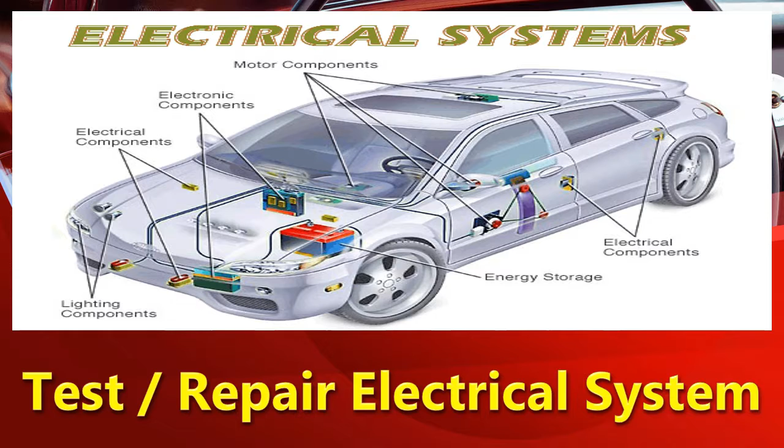We are group 1, here to present to you course outcome 7: test and repair electrical system. Our objectives on this topic are performing battery servicing, performing jump starter inspection, performing alternator inspection, and testing and replacing electrical components. These objectives will focus on the course 7 outcome.

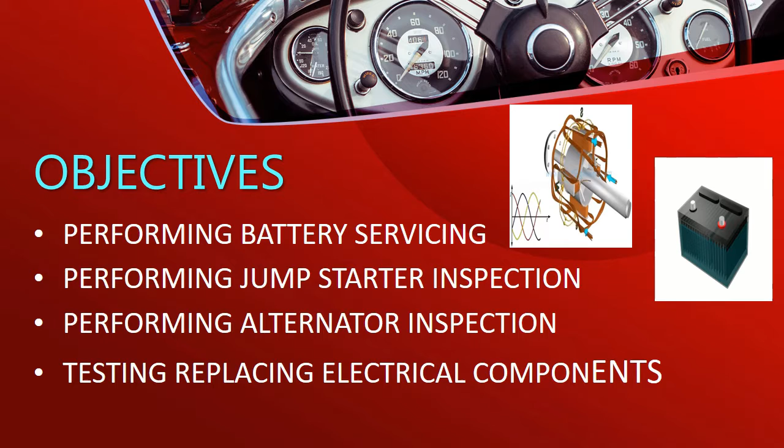Before we start, these are the safety equipment you need to use when working in the workplace: eye protection such as goggles or face shield, foot protection, head protection like a hard hat, hand protection, hearing protection, breathing apparatus, and also keep clear.

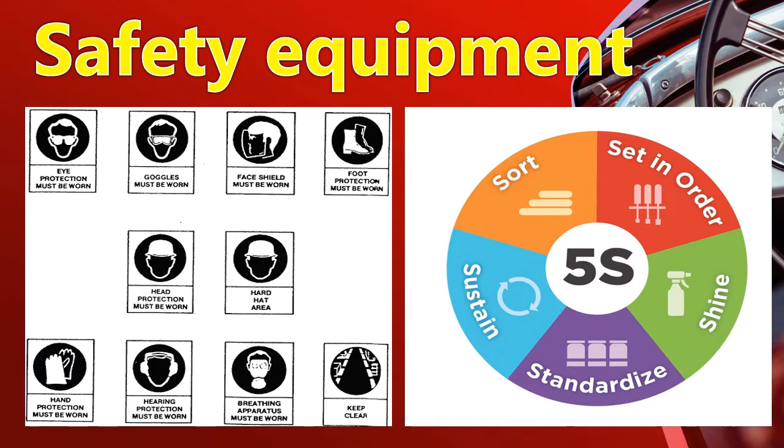Then these are the 5S: sort, set in order, shine, standardize, and sustain.

These are the tools needed for repairing the electrical system: first the multimeter, second plier sets, third SST tools set, fourth hydrometer, fifth battery terminal spray, sixth wrench set, seventh screwdriver set, and the last is a socket wrench set.

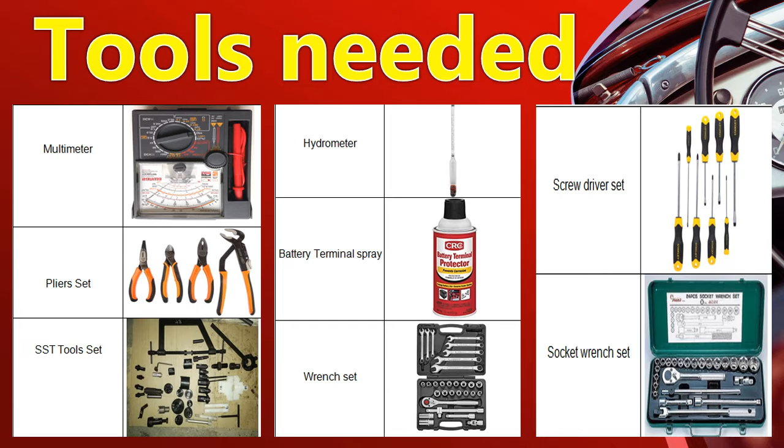So let's start. First topic is battery servicing. We have two methods to service the battery. For the first method, performing battery maintenance, this method will tackle different maintenance on our battery, for example cleaning, inspecting, and so on.

On the first step, clean the battery terminals with water and baking soda. First, identify the positive side of the battery by finding the red cap. Always disconnect the negative side first. Turn the bolt connecting the wires to the negative terminal counterclockwise and lift the wire up. Do the same for the positive side, making sure you don't touch the two wires to any metal parts of the car.

Then make a 1:1 mixture of baking soda and water. Dip a hard bristled brush into the solution and scrub both battery terminals.

This step will teach you how to clean your battery, especially the positive and negative terminals. Also, once you are cleaning the battery, never let the two wires touch each other, because this can cause sparking or explosion of the battery. Keeping the battery clean helps it run perfectly, and also prevents any hazardous things happening to your car.

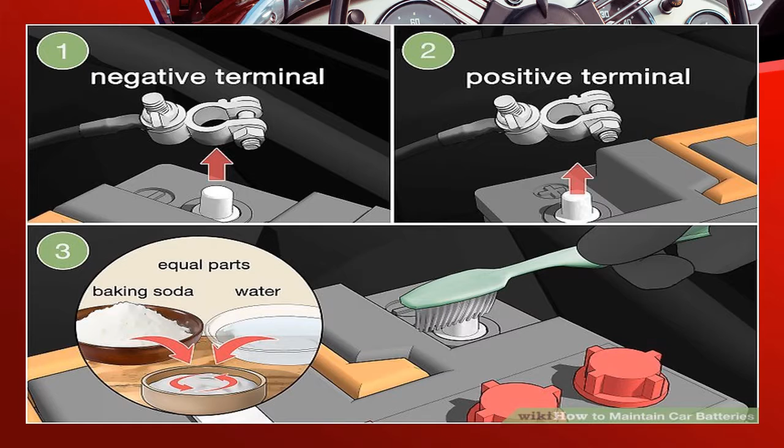Second step: coat the battery terminals in terminal spray to prevent corrosion. After cleaning the battery terminal, protect them from further corrosion with terminal spray. Hold the can 4 inches or 10 cm from the terminal and spray until the connection is coated, then spray the other terminal.

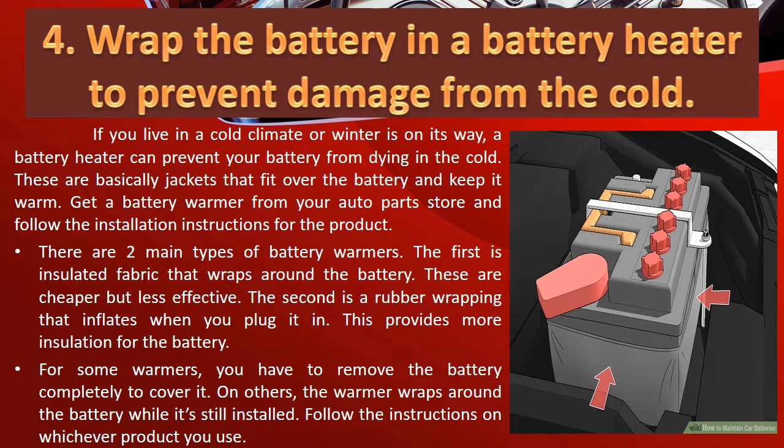Step 5. Check the battery fluid level and add distilled water if it's low. Unscrew the vent caps on top of the battery and look inside each cell with a flashlight. The fluid should cover the battery plates. If it doesn't, the level is too low. Pour in distilled water until the water covers the battery plates and reaches the bottom of the cell refill holes.

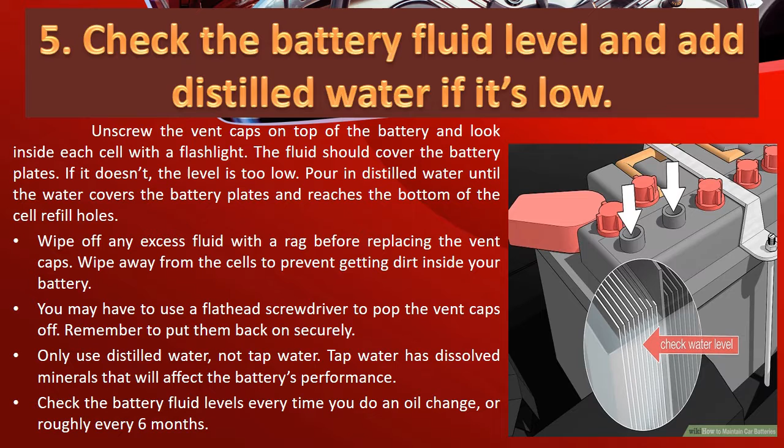Step 6. Buy a battery that's less than a month old when you replace yours. When it does come time to change the battery, always get a new one. Look on the side of the battery for the manufacture date. Find one that was manufactured within the last month for the best battery performance.

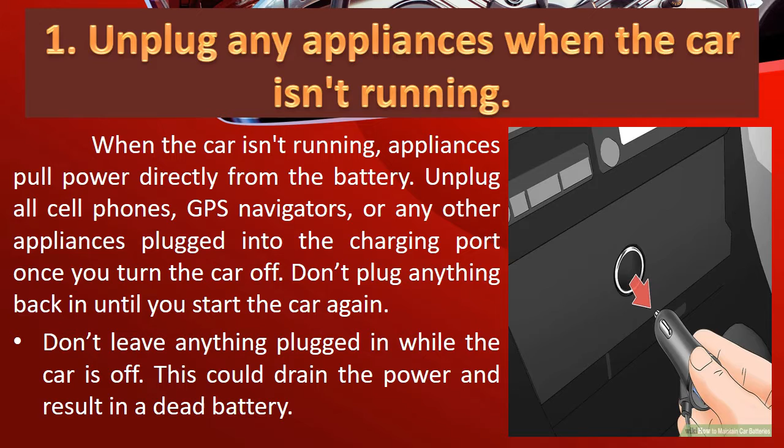Step 2. Turn off the headlights and interior lights when the engine is off. Just like appliances, these lights pull power directly from the battery when the car isn't running. Once you turn the car off, turn off all the lights that are on. Don't start them again until you start the engine.

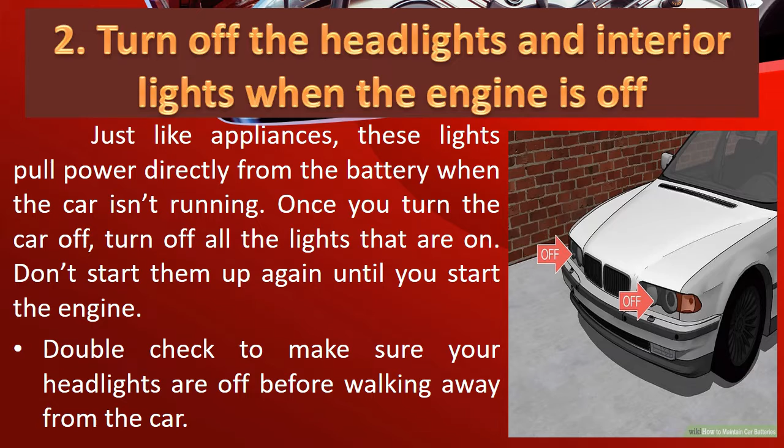Step 3. Drive the car regularly to keep the battery charged. Car batteries recharge when you drive, so don't leave the car sitting for weeks at a time. Take drives of at least 20 minutes once a week to give your battery enough time to recharge.

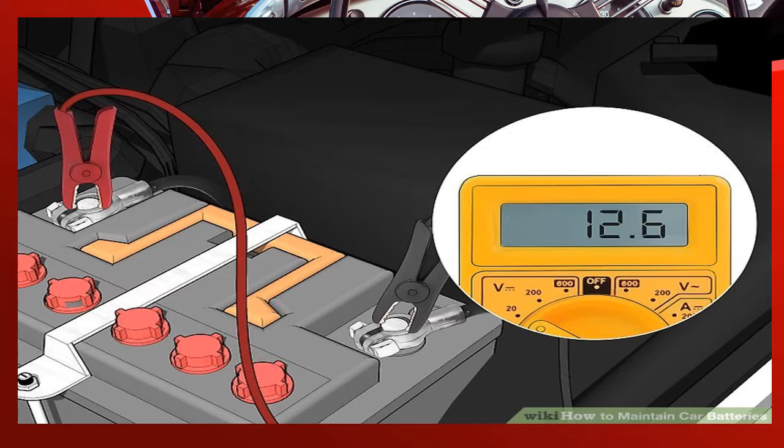Step 5. Attach a trickle charger to the battery if you don't use it for long periods. A trickle charger hooks into a power outlet and provides a steady charge to the battery. This keeps the battery at the correct charge even when you don't drive the car. It's a useful appliance for cars that aren't driven often. Connect the trickle charger the same way you would connect a normal charger. Hook the negative lead to the negative terminal first, then connect the positive lead. Then plug the charger in. Leave it attached until you drive the car again.

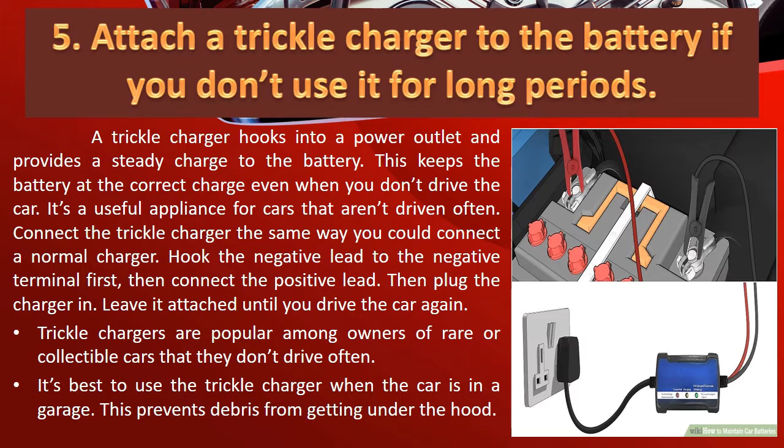So, we are done with our battery inspection. For the next inspection would be the starter inspection. We have three parts to inspect the starter. For part 1, to inspect our starter, first you must check the pinion.

First step, turn on the headlights and try to start the car. A couple of things might happen when you do this. If the car makes a noise like it's going to start but the headlights dim, then the starter pinion is probably jammed. So dito daw sinasabi sa ating first step is you need to turn on the headlights and you need to try to start the car.

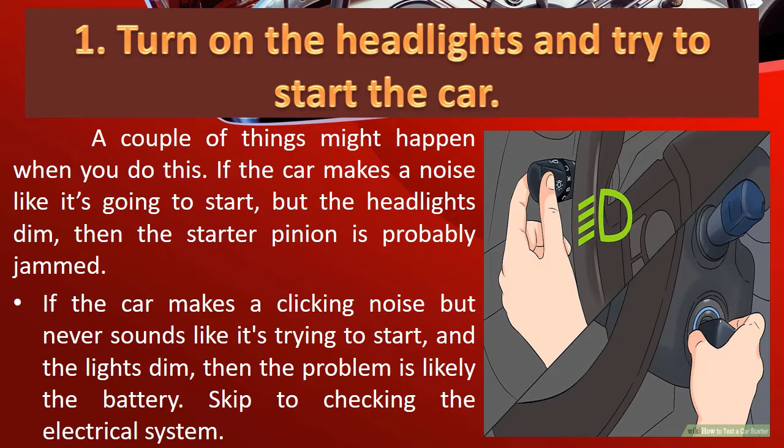Once daw na ang car is maingay habang nag-start, then yung headlight natin or yung dim light, so sinasabi dito that yung starter pinion daw natin is nagja-jam or nagkakaroon ng problema sa ating battery. So kailangan ma-check natin ito upang maiwasan ang kung kahit anong problema para sa ating sasakyan.

Step 2. Turn the pinion stub with an adjustable wrench or spanner. The starter is a large electrical motor in a cylindrical housing, and it's usually bolted to one side of the engine block. If you see a small square stub or the pinion stub sticking out of the end of the cylinder, turn it with your wrench until it moves freely in place. Try starting the car again once the pinion can move freely.

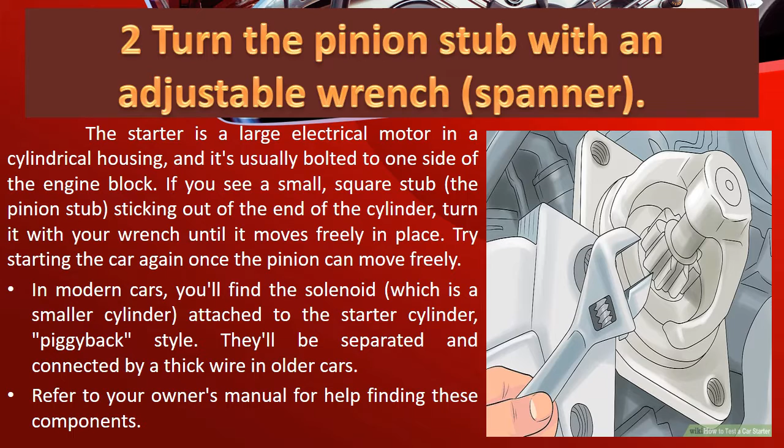So in this step, kung makikita nyo, you need to adjust the pinion stub. So bakit ba natin siya i-adjust? Kaya kailangan daw neto i-adjust is para mag free play siya or umikot siya ng maayos. Then once daw na nag free play na yung ating pinion stub, may indicate neto na okay na ang pagbibigay o pagsusupply ng kuryente doon sa ating sasakyan.

Step 3. Rock the car if you see no stub and have a manual transmission. Turn the car off and put it in second gear. Release the emergency brake and rock the car back and forth. This can loosen the pinion.

So in this step, kailangan daw naka-turn off yung car. Then yung manubela natin is ilalagay natin sa second gear. Then once na nalagay natin, i-release daw natin yung emergency brake para mag-rock yung car natin sa harap and sa likod. Then once daw na parang kumadyot na ganun, yun ang ma-indicate natin na yung pinion natin is maluwag na.

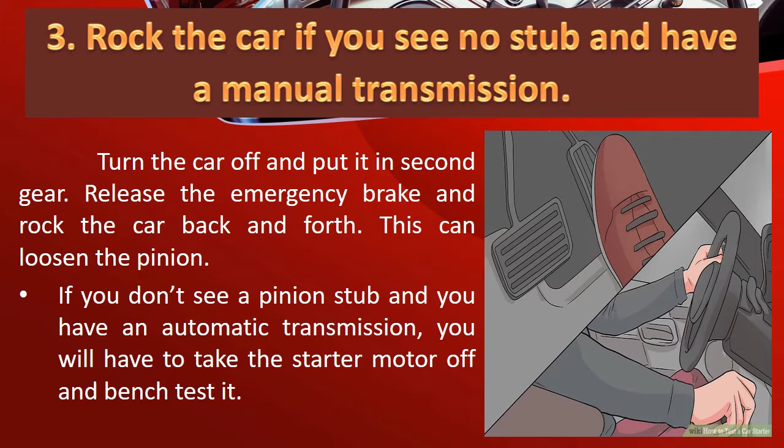So yon, we are done on part 1. Next is our part 2, testing the electrical system. So sa part na ito, titignan natin kung paano tin-test yung battery, kung paano ito chine-check, and also kung paano siya i-measure.

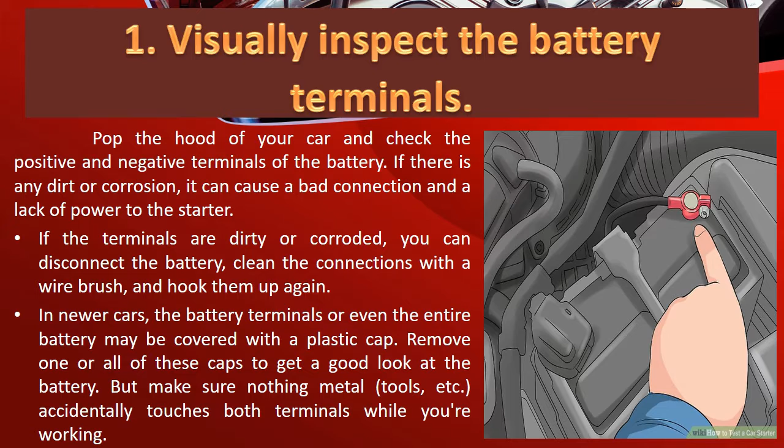First step, visually inspect the battery terminals. Pop the hood of your car and check the positive and negative terminals of the battery. If there is any dirt or corrosion, it can cause a bad connection and a lack of power to the starter. So sinasabi lang sa step 1 na kailangan pagbukas mo daw ng hood is check mo yung mga battery terminals natin kung nagkaroon na ba ng corrosion, rust, or any dirt. Kasi once na meron ng mga ganyang problema, magkakaroon na ito ng kakulangan sa pagsusupply ng power o kuryente sa ating sasakyan. So kailangan maigi na i-inspect natin ito ayon sa oras o panahon na binibigay sa ating service manual.

Step 2. Test the battery's voltage with a multimeter. Set your multimeter to its DC setting and its dial to 20 to test from 0 to 20 volts. Place the red probe on the battery's positive terminal and black probe on the negative terminal. You will get a reading above 12 volts if the battery is working properly.

So sinasabi lang dito sa step 2 na kailangan din nating i-test ang ating battery to see if the battery is good pa ba para sa ating sasakyan. So by using a multimeter, isi-set ito sa DC, sa ating meter, para makita kung yung certain volts pa ba ng battery is pumapalo pa siya sa 12 volts and above.

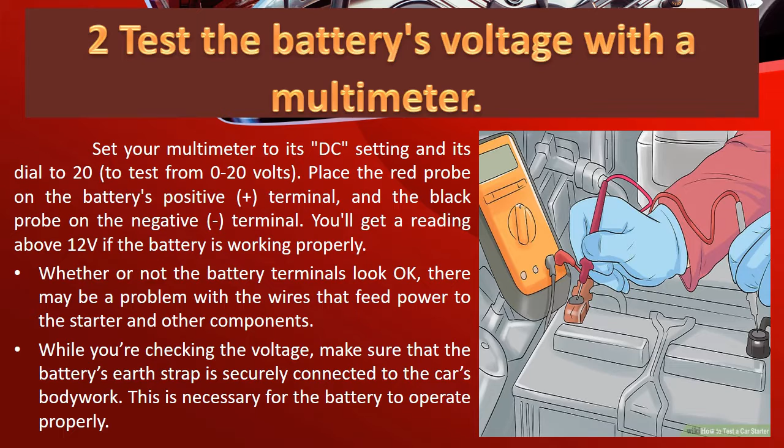Step 3. Visually inspect the solenoid. If you try to start the car and nothing happens and the battery seems to be powering properly, then there is likely a connection problem with the solenoid. This device is a small cylinder usually attached to the top of the starter. Visually inspect it to make sure all of the wires running to it are connected properly.

Kailangan daw, sinasabi dito sa step 3 na you need to inspect the solenoid. Saan nga ba nakikita ang solenoid? Kung mapapansin mo, nakadikit yan sa ating starter. So once daw na ang problema ng sasakyan natin ay good naman ang battery, nakakapagbigay naman daw ng power o supply ng kuryente sa ating sasakyan, pero hindi pa rin ito napabibigyan ng crank o yung tawag dito ay andar para sa ating sasakyan. So pwedeng magkaroon ng problema sa solenoid sa starter natin, yung cylindrical shape na nakadikit sa mismong starter.

Dito sa solenoid na ito, meron din itong mga wire na konektado sa iba't ibang parts ng ating sasakyan. Kailangan din na visually inspect natin ito para maiwasan na masira ang ating sasakyan.

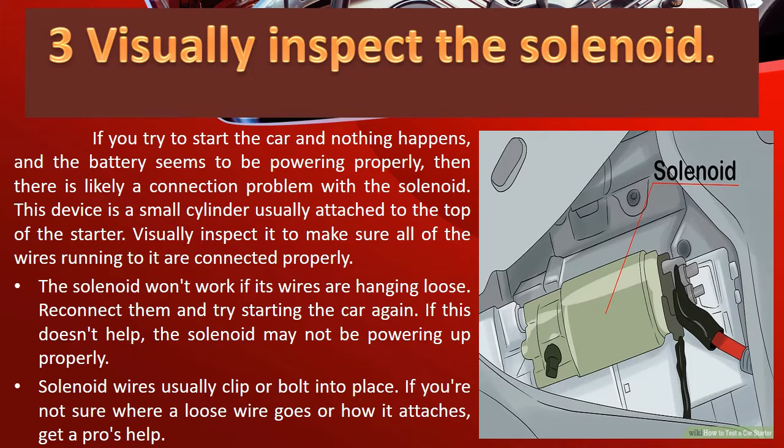Step 4. Use a circuit tester to see if the current is getting to the solenoid. Place one lead of the circuit tester or test lamp to the feed terminal of the solenoid. Attach the other lead to bare bodywork metal. If the tester lights up, then the problem is with the solenoid or the starter itself, not the current getting to it.

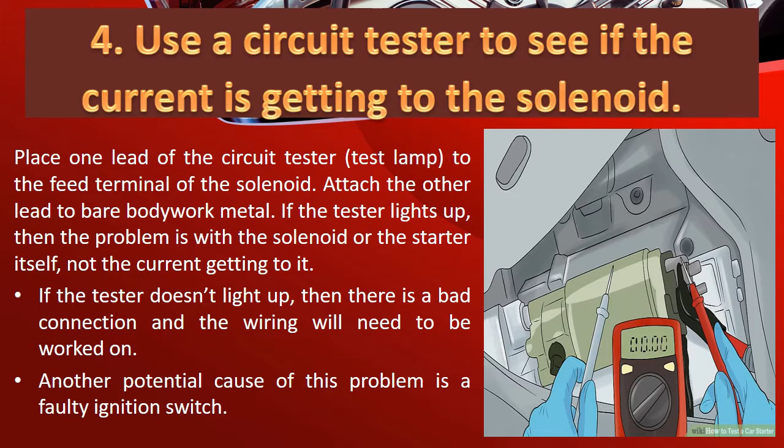Fifth step, check the solenoid output current. Place one connector of a test lamp on the output of the solenoid and the other on the battery's ground earth terminal. The lamp should light. If not, you will need to take the starter or solenoid assembly off and bench test it.

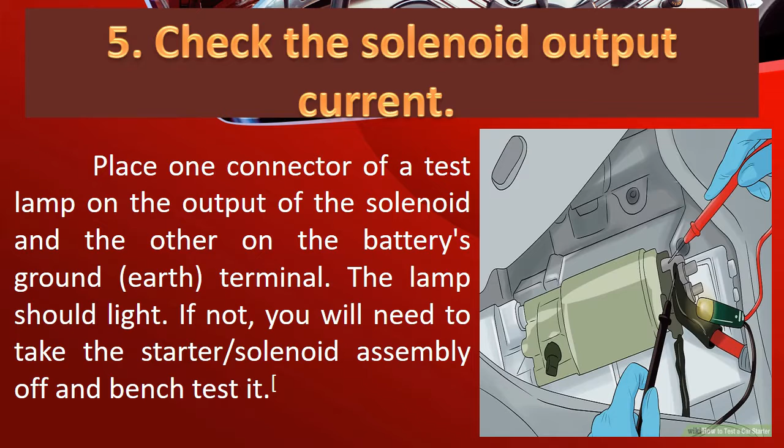So we are done with part 2. Let's proceed to part 3.

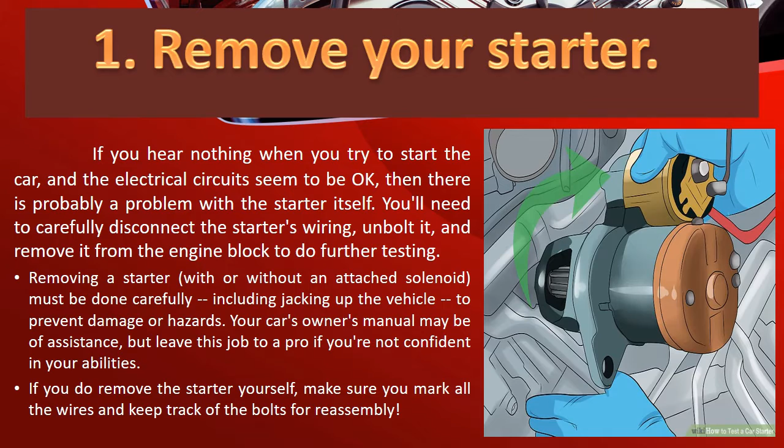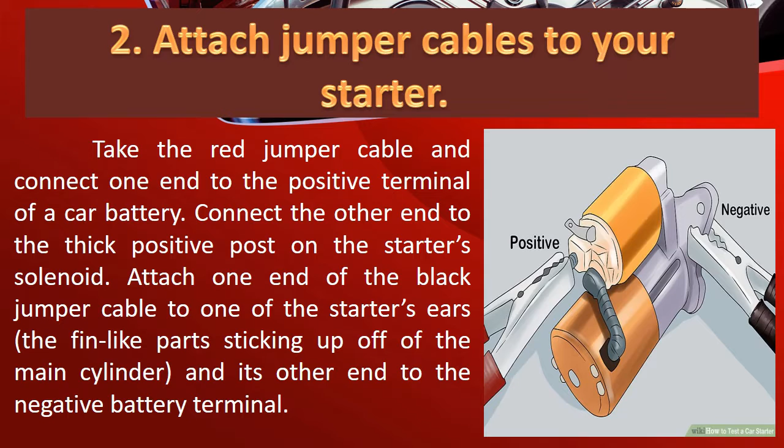Step 2. Attach jumper cables to your starter. Take the red jumper cable and connect one end to the positive terminal of a car battery. Connect the other end to the positive post on the starter solenoid. Attach one end of the black jumper cable to one of the starter's ears, and the other end to the negative battery terminal.

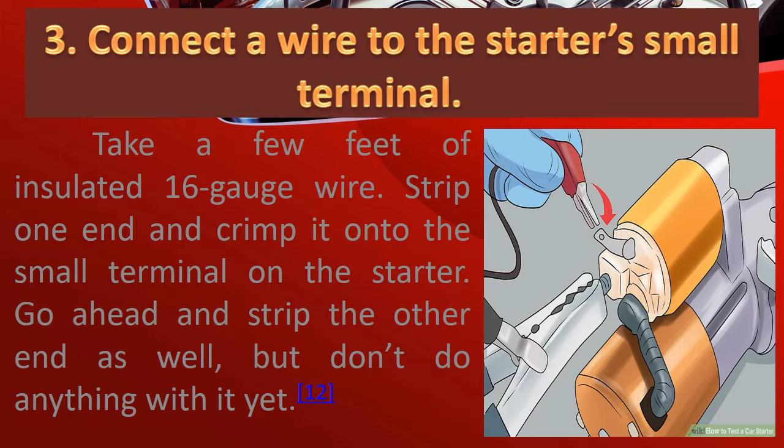Step 4. Hold the starter down with one foot. When you bench test the starter, it may move around and shoot some sparks. Holding it down with your foot prevents it from jumping around and causing injury.

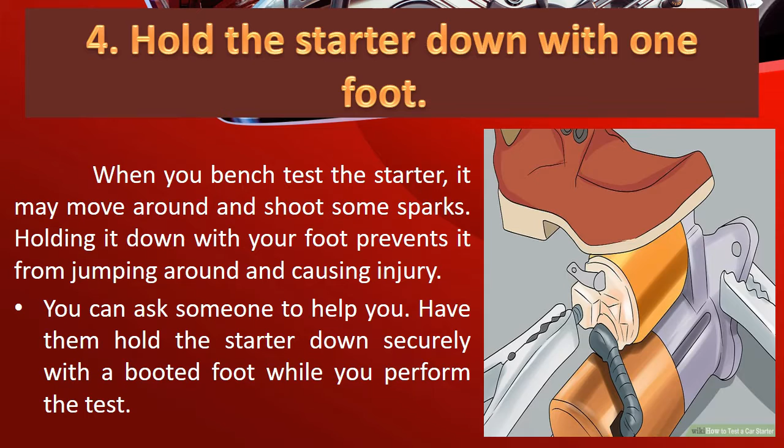Step 5. Touch the other end of the wire to the positive battery post. When you do this, the starter pinion should move and spin. If it doesn't, then the starter is bad and will need to be replaced.

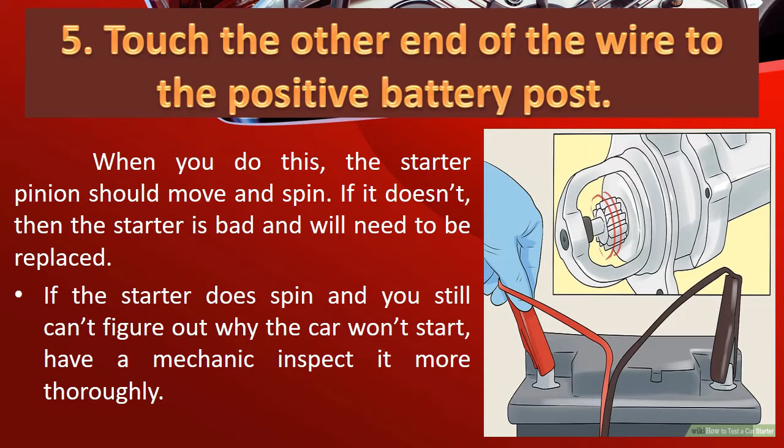So we are done inspecting the starter. Next, we will proceed to the alternator inspection. In this inspection, we have two methods to inspect our alternator.

So for method 1, using a voltmeter. Step 1: Buy a voltmeter. You can find one at any auto parts store for less than $20. Don't worry about getting an expensive one, a cheap voltmeter will do for this purpose.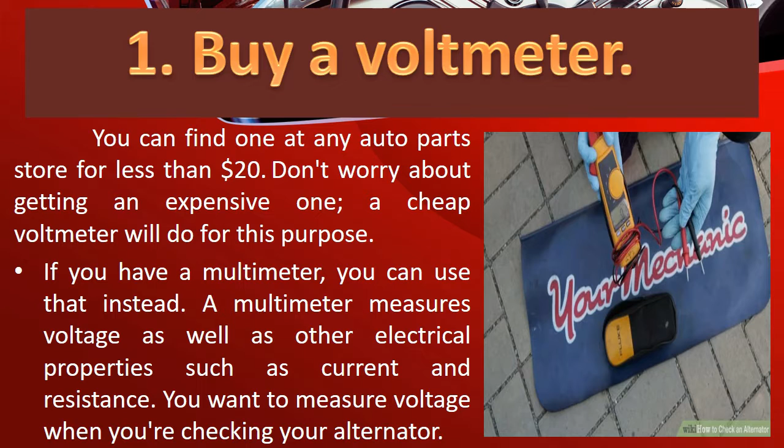Step 2: Check the battery first. The battery is needed to start the vehicle, which spins the alternator at sufficient speed to keep the battery charged. This means that if your battery is too low, you will be unable to start the vehicle, and thus you will also be unable to test the alternator, rendering any additional voltmeter testing totally useless. If the weather is cold or your battery is old, your battery could be the issue and your alternator might be just fine. That's why you need to check the battery before checking the alternator.

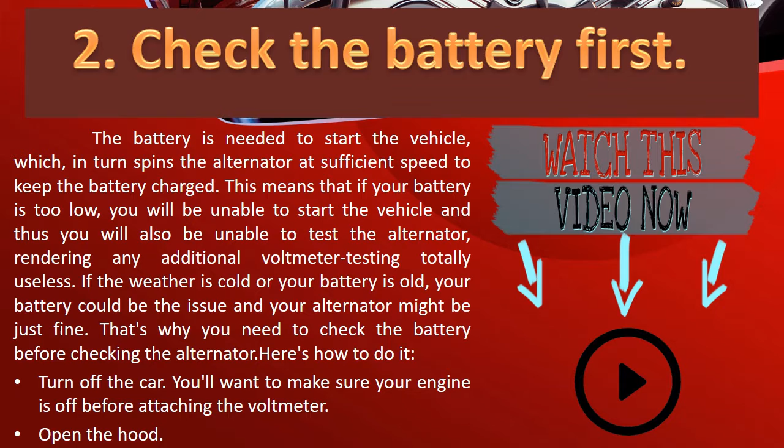Step 3: Start the vehicle and rev the engine to 2000 RPM. This will draw power on your battery, which should cause your voltage regulator to kick the alternator into higher gear.

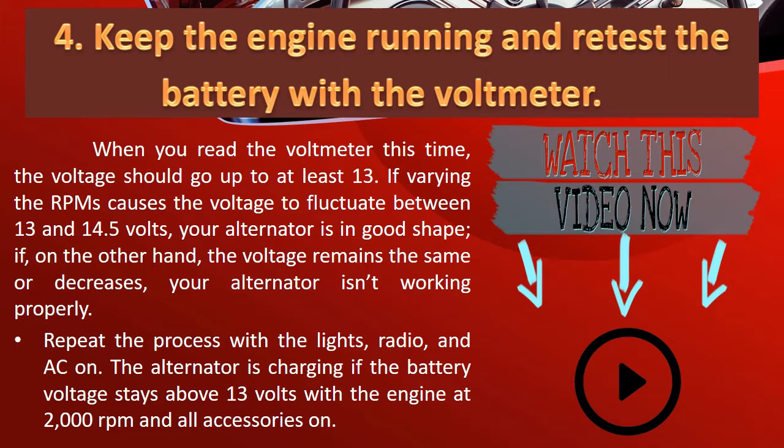Step 1: Check the alternator gauge. If you have a volt/amp gauge, it will read the alternator output for you. Run the engine at 2000 RPMs for the test and turn on the blower fan for the AC or heater, the headlamps, and any other accessories that put a strain on the alternator, and watch the gauge to see if it decreases in voltage or amperage. As a rule, if the voltmeter reads higher when the engine is running than when it is not, you can confidently assume that the alternator is charging.

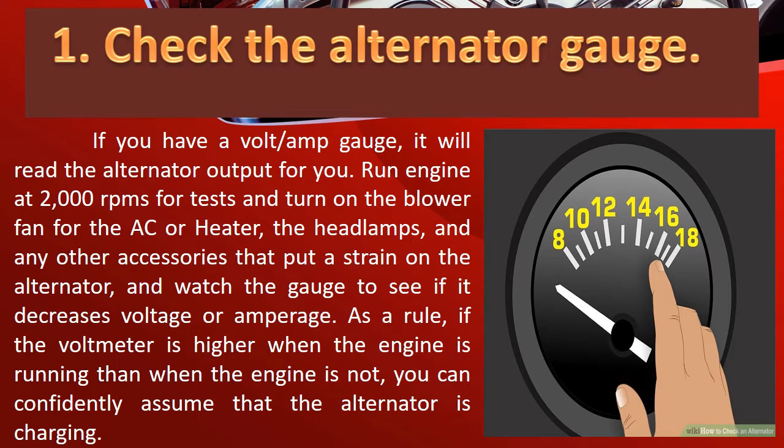Step 2: Listen to the alternator while the engine is running. If there is a problem with the bearing, you may hear a squealing sound coming from the front of the car, which becomes louder with more electrical accessories using power at the same time.

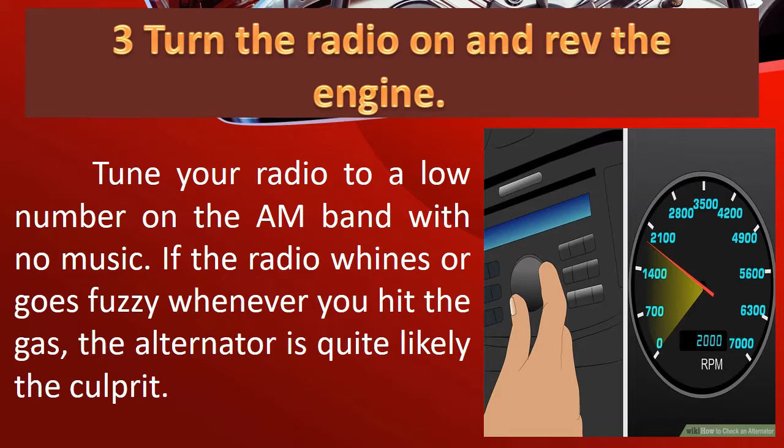Step 4: Find an auto parts store that tests alternators for free. Since every store would love for you to buy your new alternator from them, many will try to get an edge up on their competitors by offering free testing. Dismount your alternator and bring it in to be sure. So this means that once you're already a regular customer at an auto parts shop, they can recommend free inspection or testing of your alternator or other parts with problems. Because if you're a regular customer, you'll keep recommending them, so naturally, as a store owner, they'll give you good service so you'll trust the shop and their work even more.

Okay, for the last topic: testing and replacing electrical components. This topic will discuss the different procedures for removing or installing parts connected to our electrical system components. The course outline: this chapter explains the removal and installation procedures for the headlight using an electrical tester and EWD. Learn the check procedure for electrical equipment. First, removal - remove the headlight bulb. Second, inspection - check the battery and voltage of the headlight. Third, installation - install the headlight bulb. EWD stands for electrical wiring diagram.

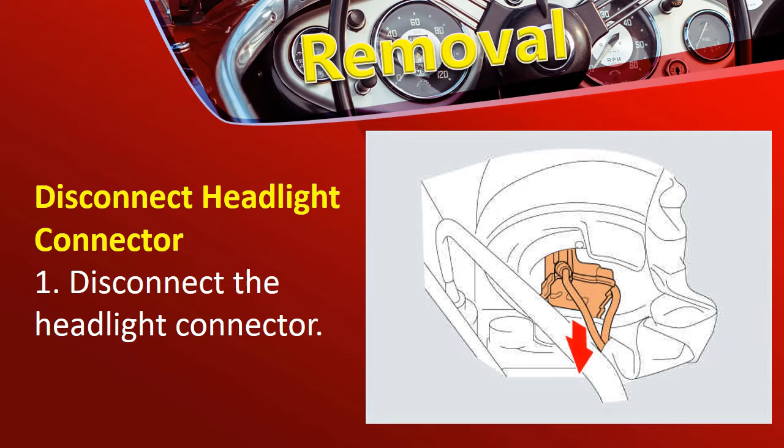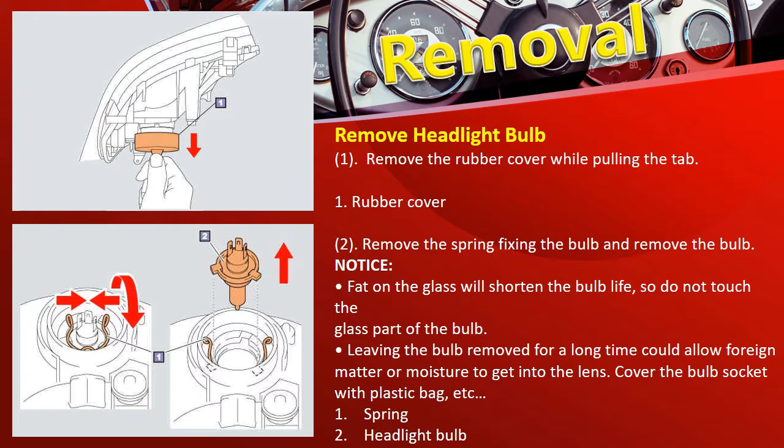For the removal of the headlight, these are the steps to remove the headlight bulb. First, remove the rubber cover while pulling the tab - this needs to be removed to make it faster and easier to remove the headlight bulb. Then remove the spring fixing the bulb and remove the bulb - the spring inside the bulb also needs to be removed. Once that's removed, we can check if there are still problems, then find a good solution to restore the headlight bulb to a good, new condition. So we have two components: the spring and the headlight bulb.

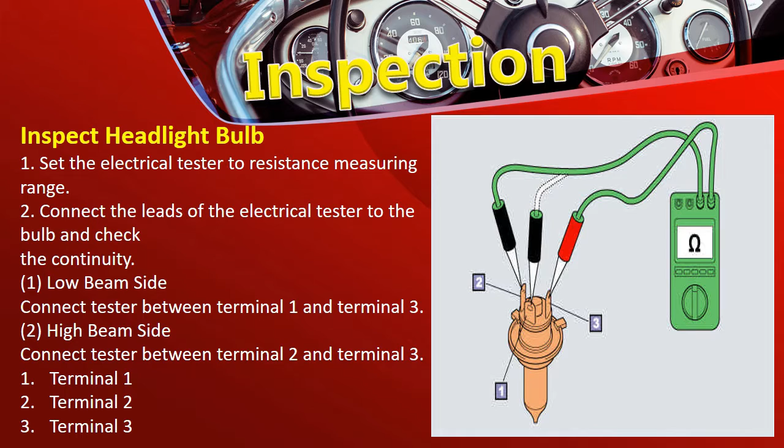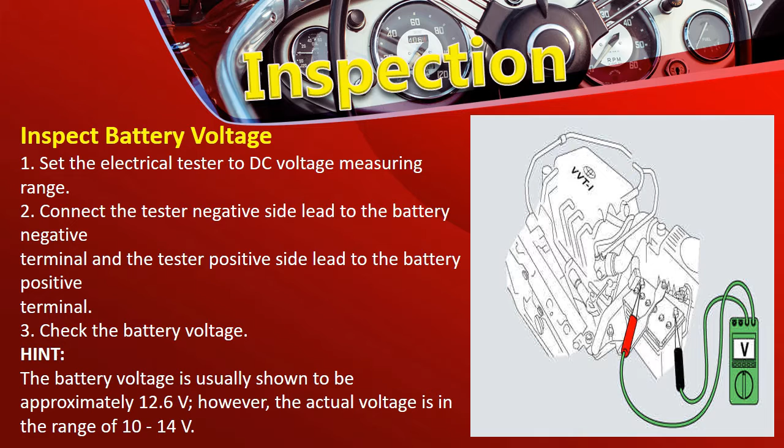Next, inspection - you need to inspect the headlight bulb. First, set the electrical tester to resistance measuring range. Connect the leads of the electrical tester to the bulb and check. Next, inspect battery voltage - set the electrical tester to DC voltage measuring range. Connect the tester's negative side lead to the battery's negative terminal and the positive side lead to the positive terminal. Then check the battery voltage. Hint: the battery voltage is usually shown to be approximately 12.6 volts, however the actual voltage is in the range of 10 to 14 volts.

Inspect headlight circuit - check the headlight connector. See the electrical wiring routing or electrical wiring diagram to confirm the position of the headlight connector. Hint: check the connector on the vehicle harness side. Refer to how to use this manual to see how to use the EWD. So we have two connectors, the first is headlight connector 1, and the second is headlight connector 2.

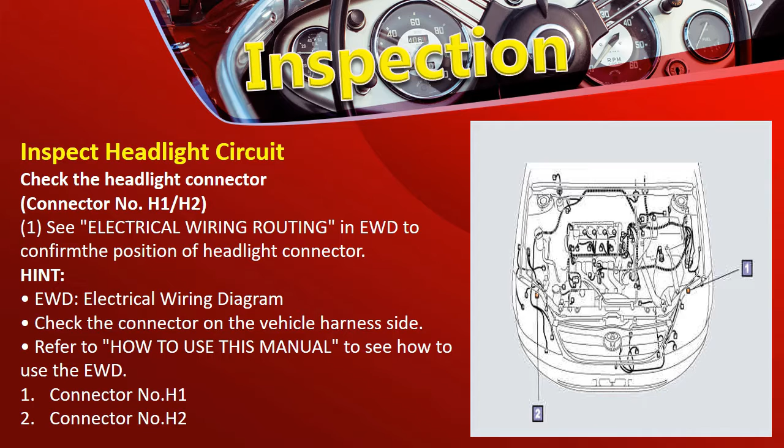Next is See connector list, also related to inspecting the headlight circuit. Number 2, check the connector list in EWD to confirm the shape, pin, and number of the headlight connector, and check the connector on the vehicle harness side.

Refer to how to use this manual to see how to use the EWD. We have two: left headlight side headlight bulb connector, headlight 1 gray; right headlight side headlight bulb connector, headlight 2 gray.

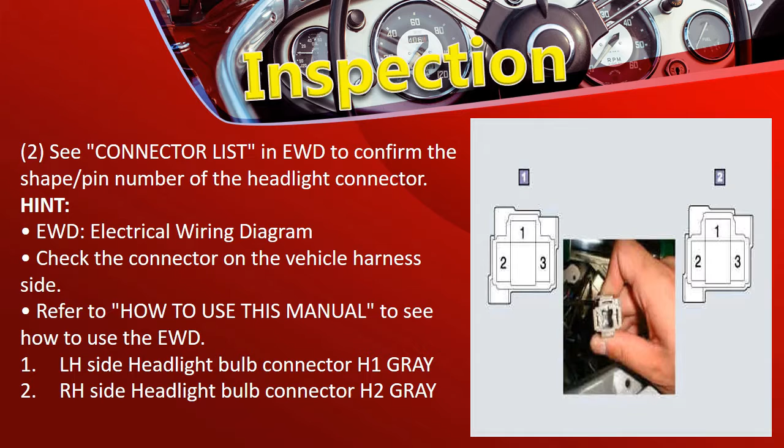Again, connection pa rin about to inspect the headlight circuit. Number 3, check the system circuit in the electrical wiring diagram to confirm the wiring color of the wire harness.

Also, as same as on number 1, you need to check the connector, same as before. Headlight 1 connector LH, headlight 2 connector RH. As you can see on the picture, these are the diagrams on the headlight.

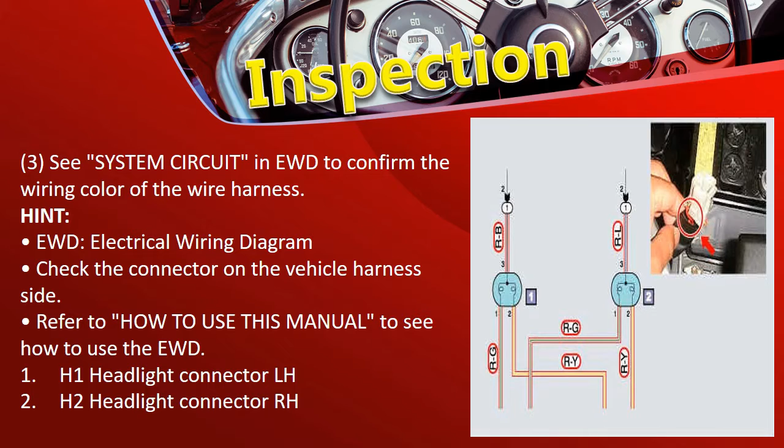Next, inspect headlight connector voltage. Connect the tester leads to the terminal shown in the illustration. Check the voltage by connecting the tester leads to the headlight connector on the vehicle side. Never push the terminal or apply strong force, as this could cause damage to the terminal.

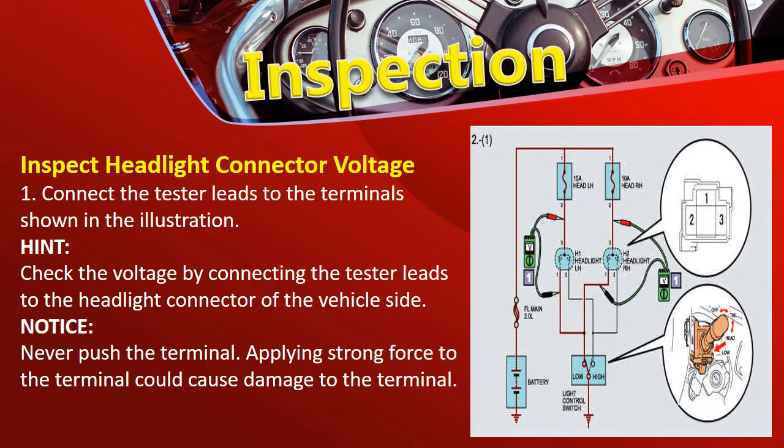Part 2. Check if the light control switches and that the voltage of the check terminal changes when switching the light control switch between low and high: low beam and high beam. Then number 1, battery voltage.

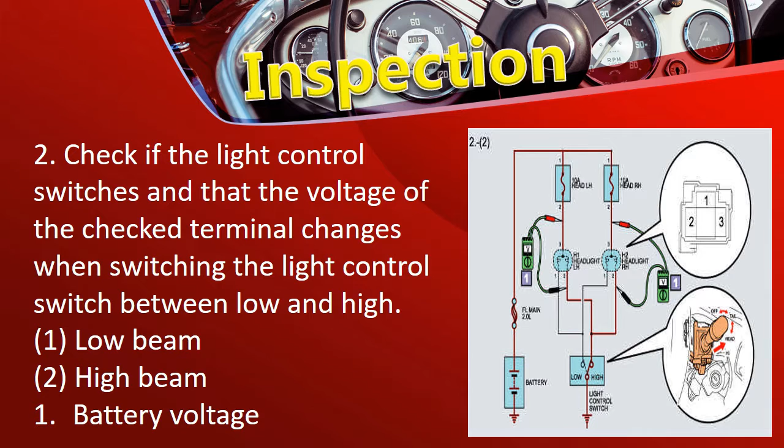Next, installation. Install the headlight bulb. Match the bulb tab with the bulb socket notch and fit the tab into the hole. When replacing the bulb with a new one, be sure to use a bulb of the same wattage.

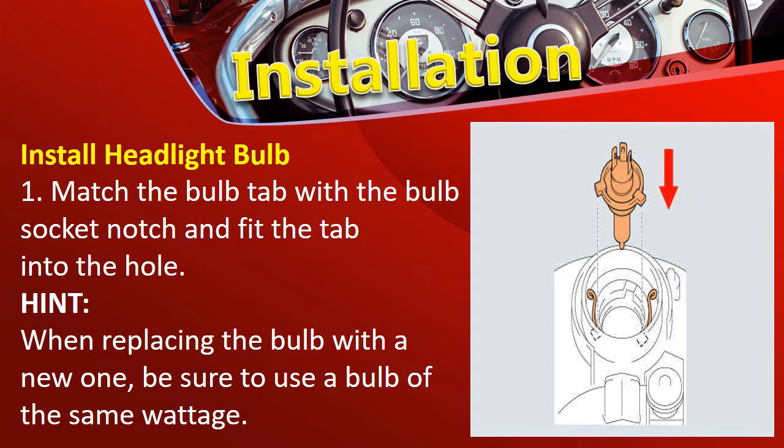Part 2. Hook the spring and fix the bulb. You need to hook the spring.

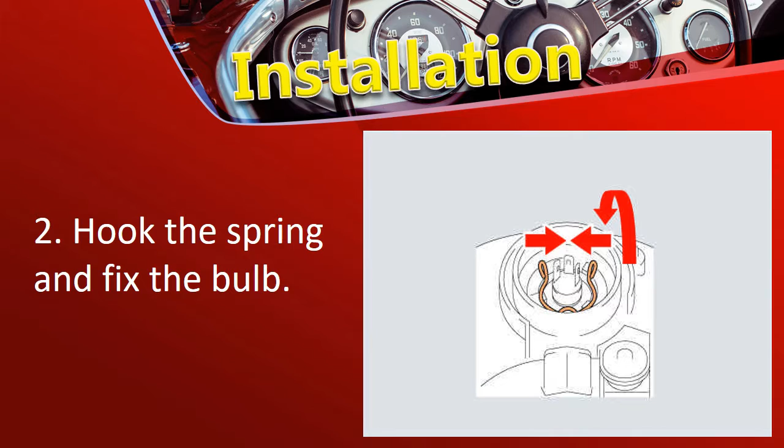Next, connect the headlight connector. So connect the headlight connector.

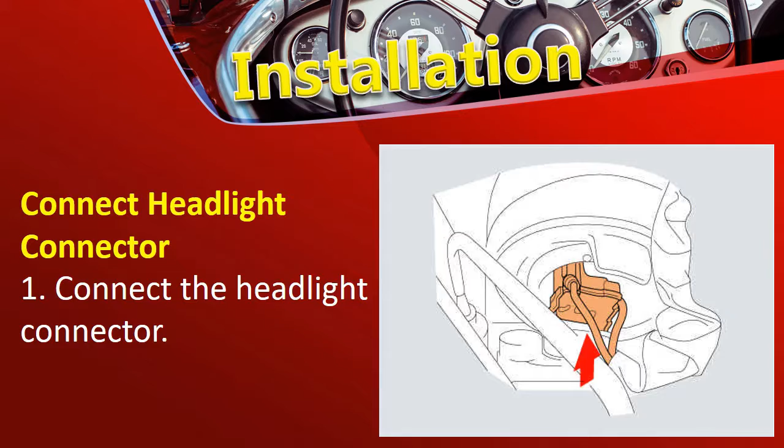For the final inspection, check for mistakes in procedures for installing electrical equipment and check that the headlights operate properly. Operate the light control switch and check the corresponding lights turn on at each switch position: 1 low beam, 2 high beam.